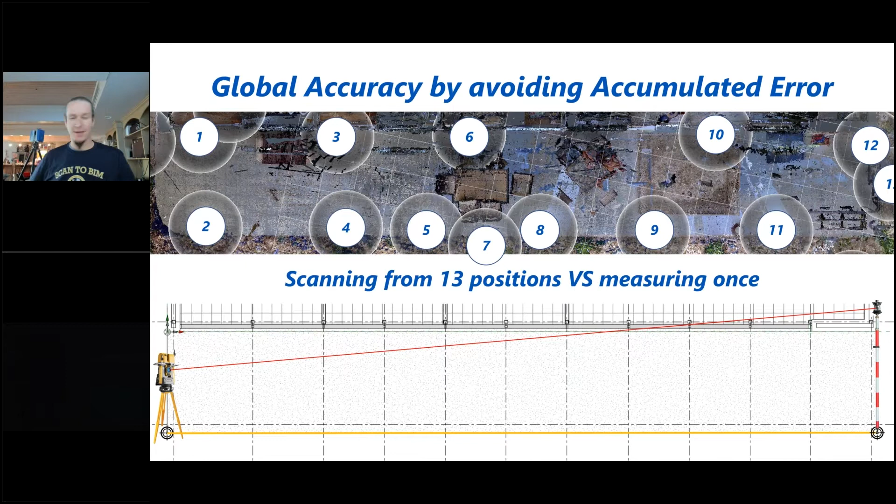So there's a couple reasons why control is really useful on scanning projects. The first one is accumulated error. Anybody that's spent time with a tape measure knows this the hard way. If you take a bunch of small measurements and add them all together, then take one big long single measurement with a much larger tape, you'll get a different number. That's because every time you make a small measurement, there's always some error. There's no such thing as a perfect measurement.

Same thing's true with laser scanning. When you're doing cloud to cloud, you're doing multiple setups. In this example, there's 13 setups on one small exterior facade of a relatively small building, which means there's some amount of error between all of them. As opposed to control, which is usually established using a total station with much longer ranges. They take lots of measurements at the same point, so you get really accurate single measurements, and that really allows you to get rid of that accumulation. So 13 positions versus a single measurement.

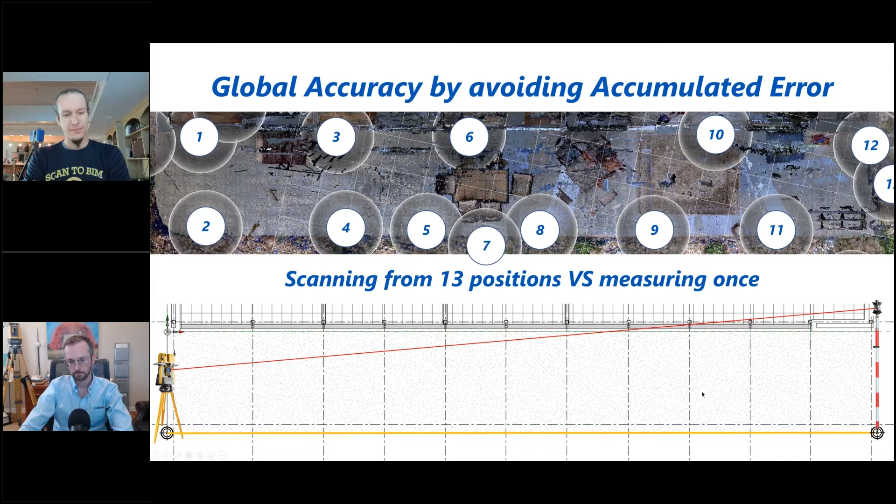That's the difference between plus or minus 13 millimeters versus plus or minus 1 millimeter, if you think about the potential compounding error, assuming you're getting plus or minus 1 millimeter in your cloud-to-cloud matching, which is probably a little optimistic. Now it doesn't mean it's always 13 off - it might be 6 off, might be 2 off, might be 8 off. But that accumulated error is something that can really bite you, particularly on larger projects and in long corridors, long facades, things like that. So yeah, it really adds up.

So doing these single measurements for control really lets you rein that in and get it down to a minimum number of overall measurements.

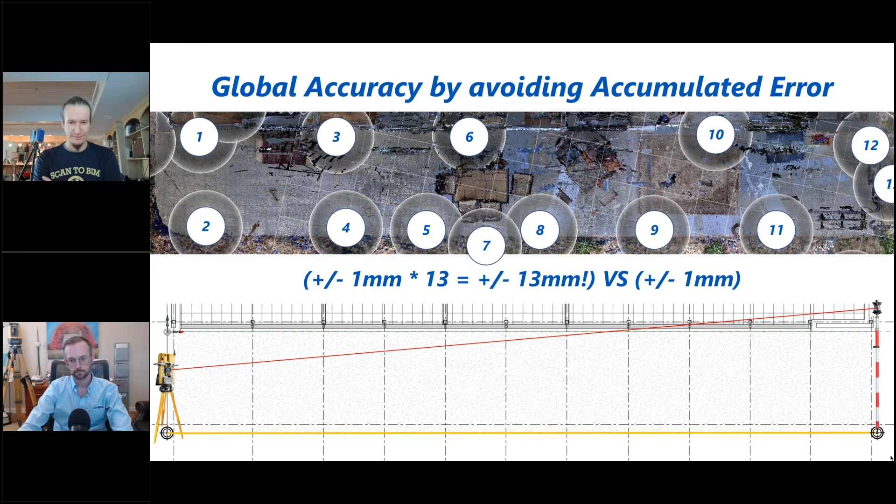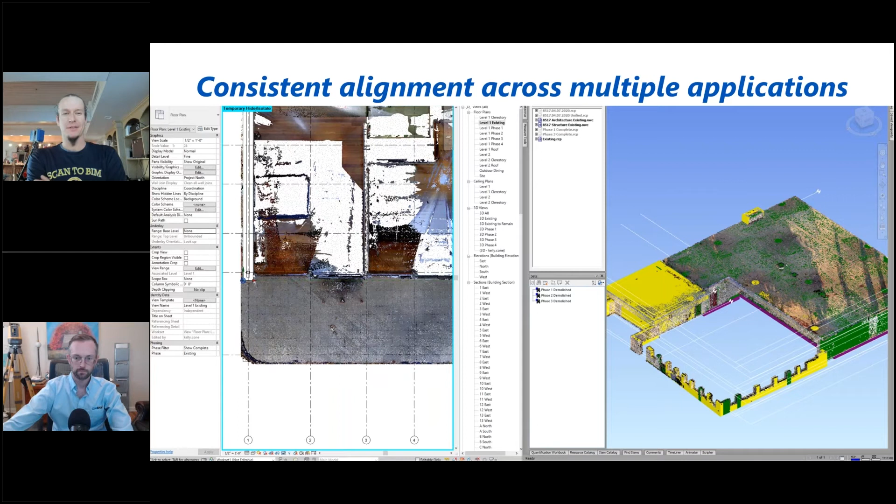The other critical thing for having a control system - and again, it doesn't have to be a survey control network you're tying into, just some kind of control network, could be assumed on the site, could be project coordinates, whatever - is that getting some kind of control set up allows you to consistently bring your point cloud into multiple applications across multiple companies and have it actually show up in the right place every time.

I don't know if anybody's ever messed around with trying to nudge a point cloud and rotate it into place in Revit. If you're the only person doing that, and that's the only application you're using, okay, I guess that's fine - you can't do it super accurately, but you can probably do it good enough. But the moment you want to pull that into Navisworks and have the point cloud show up in the same place, ugh. Or what if you wanted to...

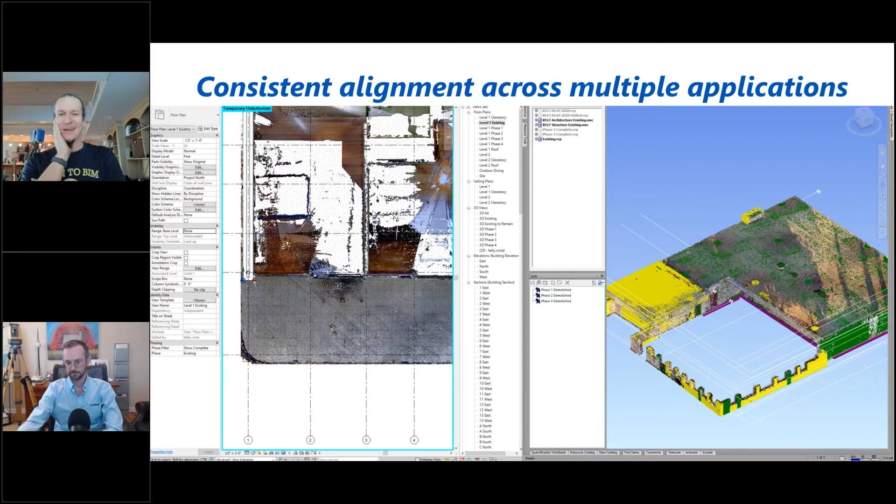What if you wanted to pull it into Recap, since now you can bring Navisworks models into Recap? Well, if you didn't have that set up correctly, good luck. Same thing if you want to go into Tekla, or any other platform - having that consistent alignment across multiple applications is really, really important to scale the technology.

And again, if you've done any registrations in bathrooms, places with mirrors, lots of glass, you'll know that you'll get a cloud-to-cloud alignment and everything will be green. But when you look at it, it's rotated 90 degrees, or completely shifted off, or something else. The cloud-to-cloud gives you statistical metrics based on the algorithms used to do the match, but if they picked bad surfaces or bad alignment, the statistical metrics can be great, but the alignment can be feet, hundreds of feet off.

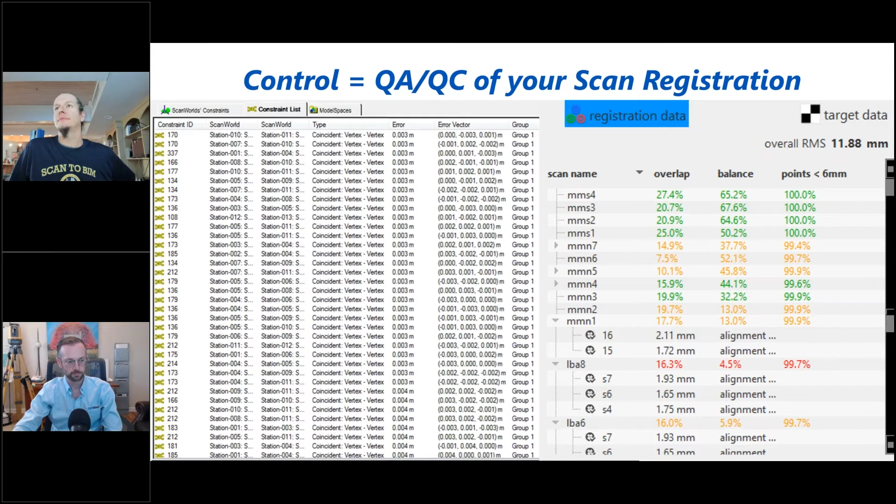Yeah, that's a great point, Kelly.

I think, talking about establishing control for a job, we're going to really speak to why it's important. So imagine this is a scan of the structure of a mid-rise building, for instance.

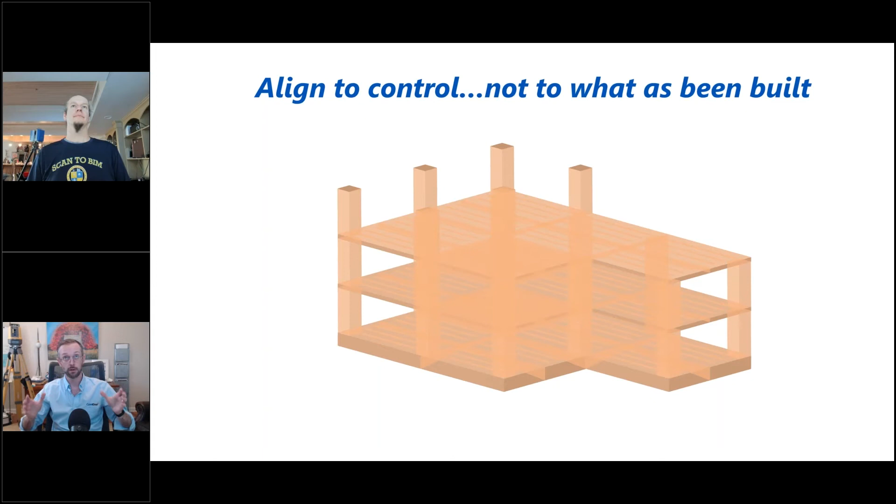If nothing has been designed yet, and if you're scanning existing conditions only and nothing has been modeled, you can get away with doing cloud to cloud and not establishing control, although we will speak to why that's still dangerous. The minute that a building is getting built and you are validating whether something has been installed correctly, or scanning because you're tying a really unique facade to the exterior of a building, whatever you're doing, not tying into control can be devastating for your job, and also for you as the person performing the scanning. Here's a good example of why.

I see all too often people will scan and align a scan of the floor to the design model, but how many jobs are perfectly built? The answer is like none. So if you align your scan to, say, a column that's 2 inches off, well now relative to that floor, everything else is going to be 2 inches off. Or you may align and think everything is fine, when really there's all this stuff that's been installed incorrectly. You will never catch it until it's too late.

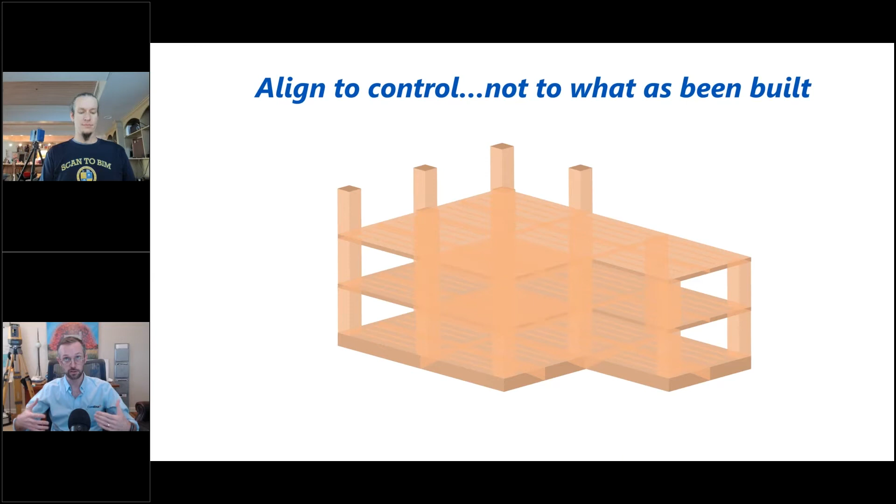The point of scanning, especially as a project is getting constructed, is to catch issues. So if you have control, if you were to tie into that survey or control network used to build a building, the scan is shifted and it will highlight installation errors or something you should truly be concerned about. It could also keep you from thinking something is wrong when it's actually a red herring - something may have been installed correctly, but the way you aligned it made it look like it wasn't. So it's very critical, especially as you're pushing scanning on projects or selling it as a way to mitigate risk, that you tie into control whenever possible.

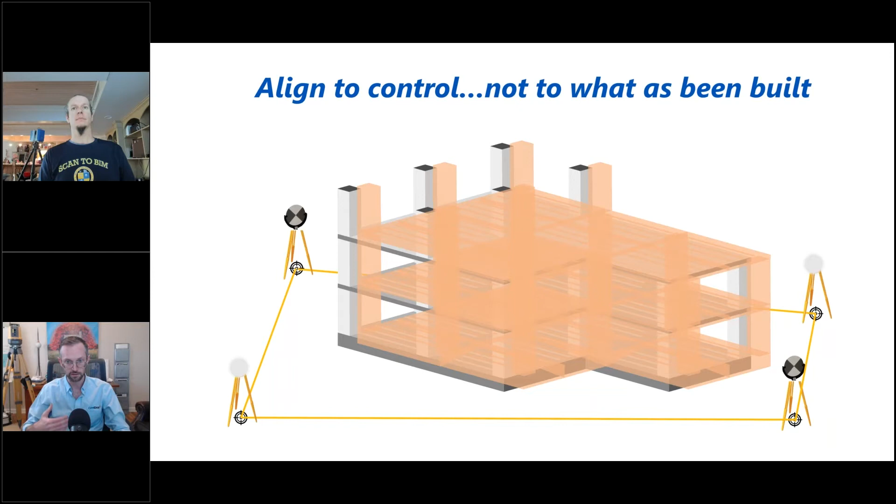Now, depending on the piece of equipment you are using, it is very important to understand what kind of targets you can utilize. So we have survey targets on the left. There are scanners that can actually utilize those survey targets, as well as total stations. Planar targets are fairly popular for cloud to cloud - you'll see every cloud to cloud job use a lot of paper targets that we mount to walls so we can constrain ourselves to those things. And then there's geometric targets, which are also really awesome to utilize, especially at distance because of their unique shape.

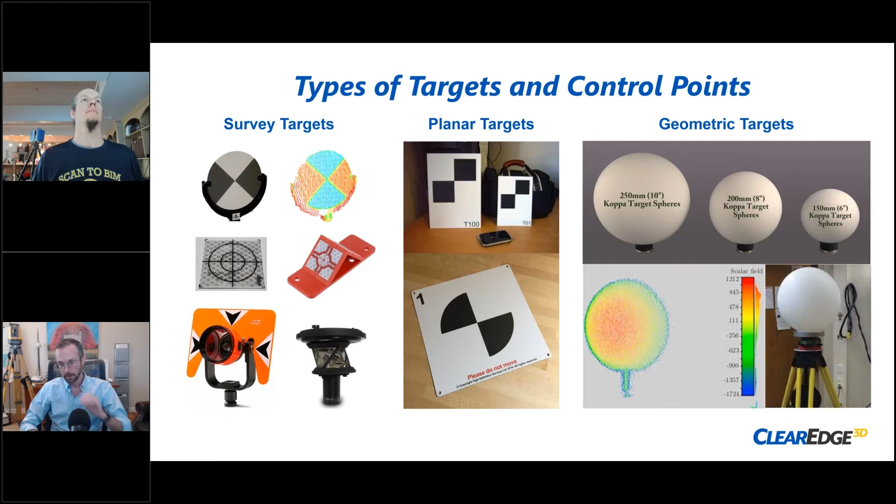Besides that, if you are setting control for the first time, you can literally just put monuments, or nails in the ground, or use a Sharpie to establish this is the thing that I'm going to set up on. And what we mean by that, we'll actually get into in a second.

So before we get into setting control, for those thinking about getting into surveying for scanning jobs, traditional robotic total stations can be fairly expensive, but there are some good and cheap investment options for you, like the LN150 from Topcon, and others. I just suggest looking at that if this is your first bout with starting surveying. It's super low cost, it self-levels, it has a great range for most jobs you're going to be on, and Bluetooth technology, so you're not worried about losing tracking of the instrument itself - if it was just Wi-Fi, at distance you could lose it.

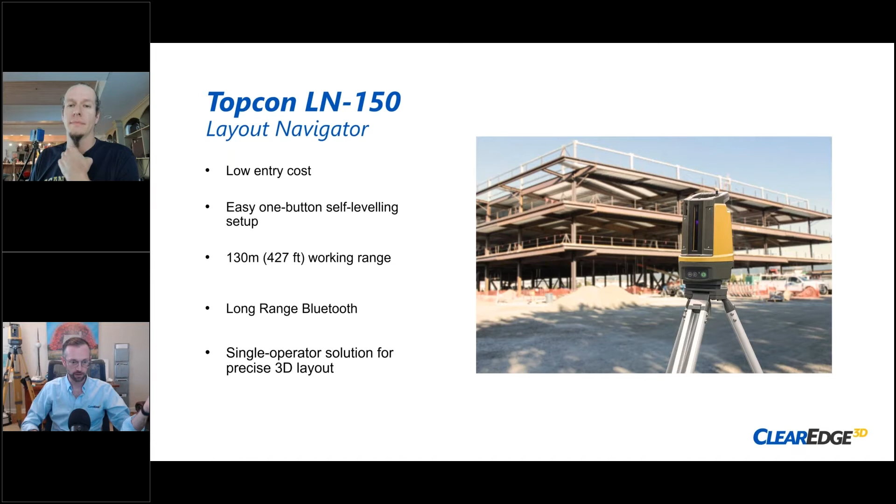Yeah, actually it's funny, James. We got a question coming in from Scott Reed, one of our customers, Prolog, and apparently Scott just picked up an LN to supplement their optical total station. So yeah, Scott, it's a great instrument for getting control out there.

The thing you can't do with it that you can do with your optical total station is bore sight, a black and white crosshair on a target. But you can, of course, as long as you've got the pole with the rod, set it up on any floor targets really easily and basically use it the same way. So it just depends on how critical that ability to bore sight is, but some of the other stuff you'd shared with us in terms of having that cool stick at an angle, things like that.

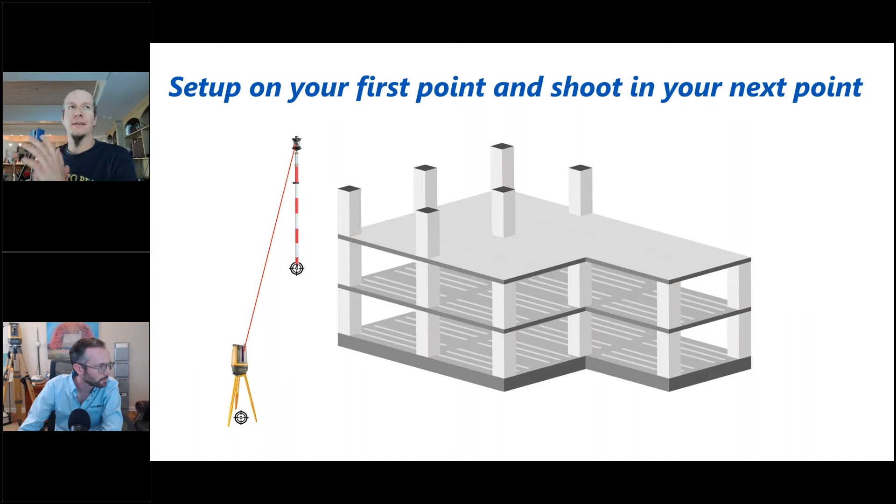If you put prisms on those things instead of spheres, absolutely you can use the LN to do very similar stuff. It's really just a simple instrument, the kind of thing you don't have to be an expert at surveying to utilize. I think that's the scary thing, though. A lot of people can mess up setting control because the software and the instrument itself require way more expertise than most people are trained on. So something to think about.

Okay, so let's say there's a job where, like we showed prior, the scan had shifted, and we said put yourself on control. So how do you do that? If there's nothing out there, or if you want to set your own control as a source of truth to come back to for this job over and over, or to give to a design team to model from in Revit or whatever.

You start off by marking a point on the ground, then set your instrument on that point. Then you walk with your prism and shoot in another point. You want to make sure the distance is pretty good. Imagine if your next point was only 5 feet away, and the point after that is 100 feet away. There's error, right? Because these poles, you reduce error the farther your shots are from each other.

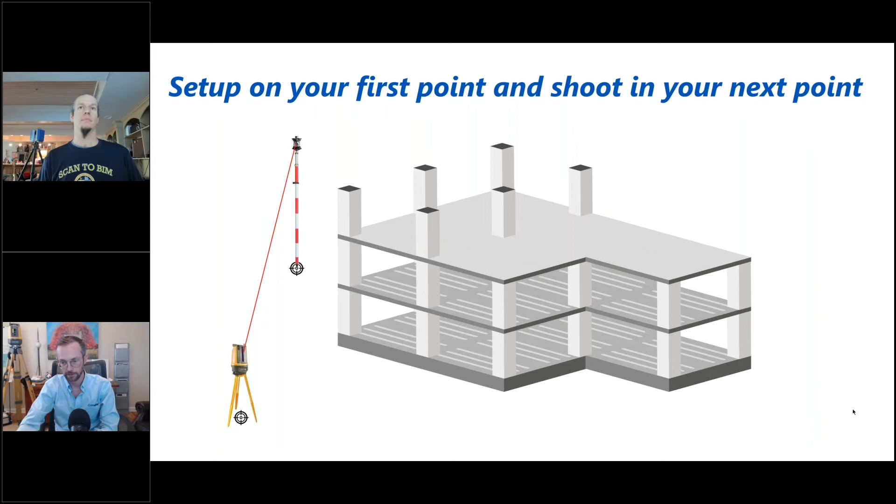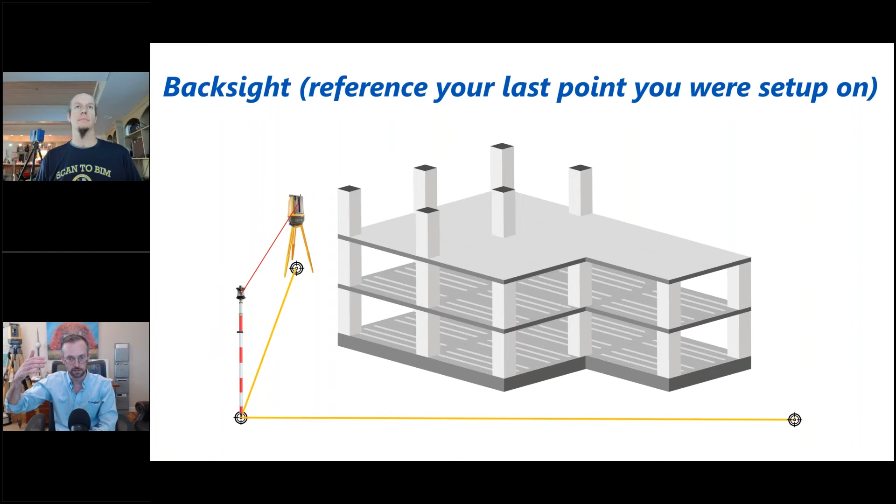So to keep it simple, you set up on your first point, and if you know where you're going to end, imagine we're going to build effectively a square around this building, we may want to save time and shoot in the point where we're going to finish. Then we make our way around the building, referencing the last point, turning 90 or 100 degrees, whatever it needs to be, shooting in the next point, and rinse and repeat. Super simple, really fast.

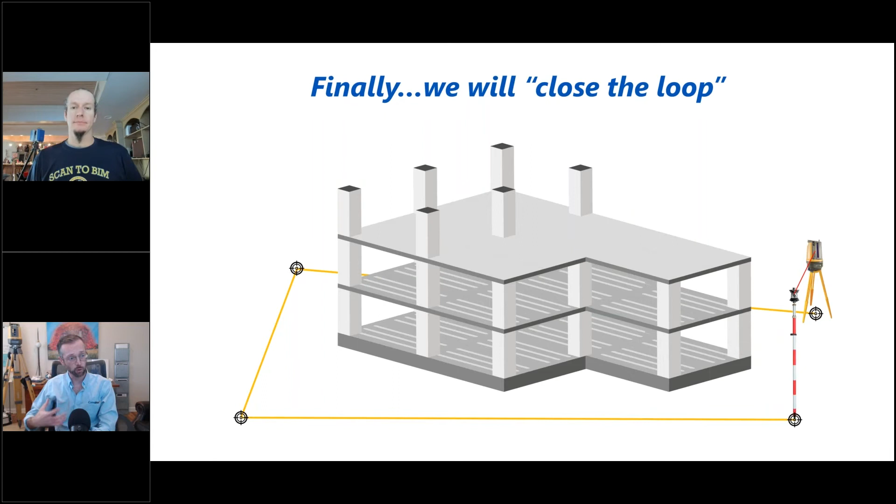And then all of a sudden you have a coordinate system that you can reference for your scanning project.

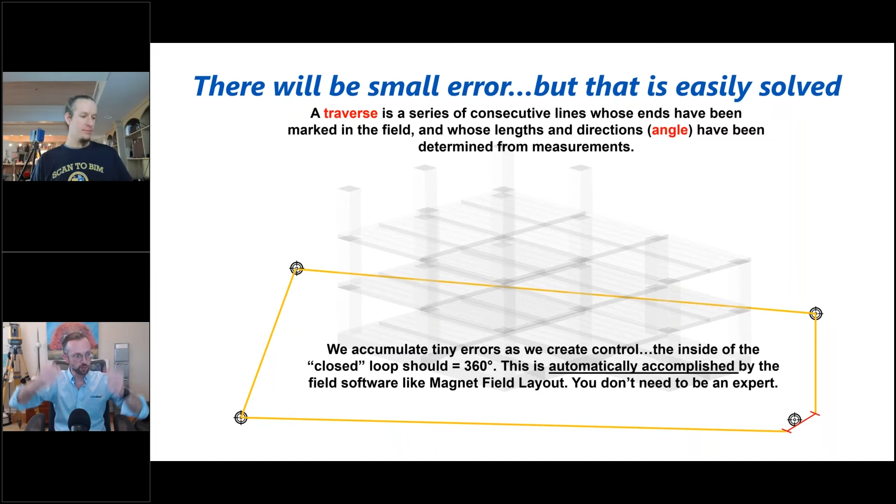Something to note: just like with scanning, if you traverse with a scanner, traversing is doing a setup and moving, and the distance between those lines is called the traverse. Best practice for setting control in a job is you want to close the loop, make a full polygon, or complete your square. This is effectively a polygon, or it is a polygon.

All polygons have 360 degrees inside them, but as you traverse, you actually just accumulate error. There's a little bit of human error, and there's error in the instrument you're using, no matter what it is. But not to worry, the field software you're using will automatically distribute that error across the polygon, and then you have a very tight control network you can rely on consistently.

So those of you that've done a lot of scanning have seen this: you go down a rectangular corridor with your scanner doing cloud to cloud, and when you come back to that same area you scanned the first time, boom, all of a sudden you've got visible error between the first scan and the last scan that you then have to build a link between, rerun it, and hopefully that closes everything up tightly.

But the same thing is true with total station measurements. The difference is instead of 100 measurements between the first and last scan, you have 3 or 4 or 5 or 6. So those check-in points are much fewer, and the errors are much smaller overall, but there is still an error to correct for.

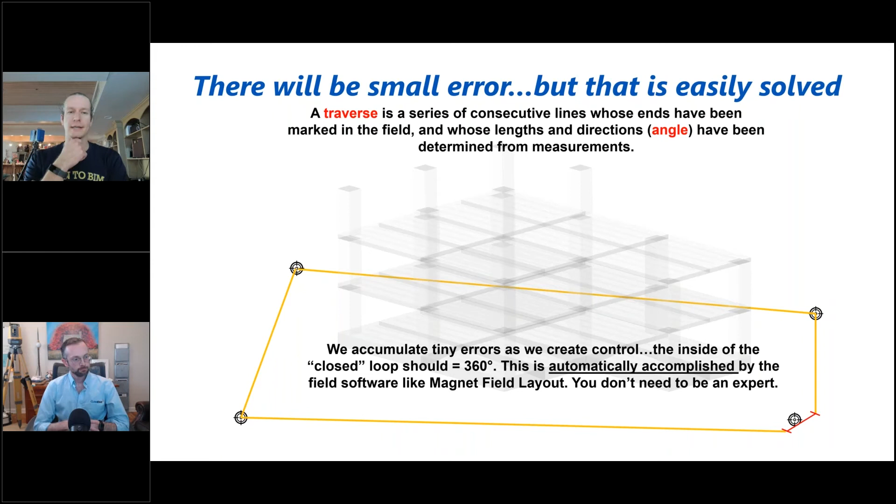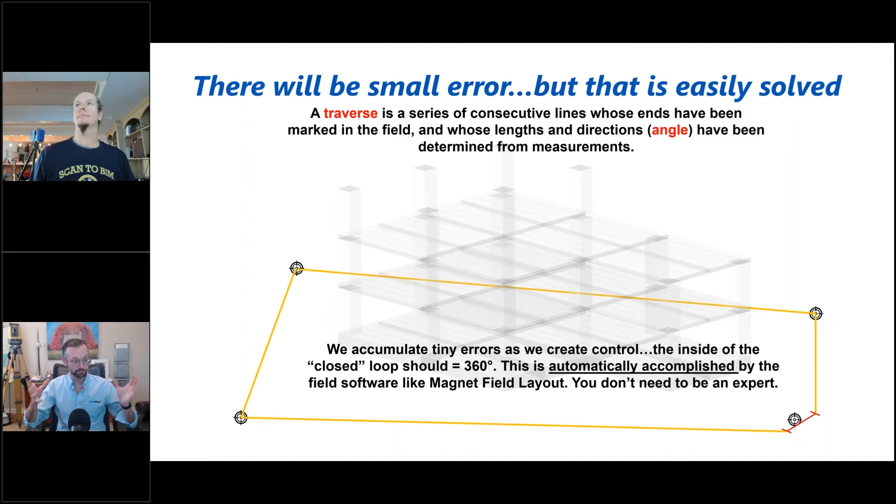I'd say specific to prism poles or calibration, you can just give us a call after on some of those, because there's things called a peg test you have to do, but they're normally handled by whoever supports and maintains your equipment, whether that's you or who you bought it from. Any advice on grid or ground coordinate systems from Shannon?

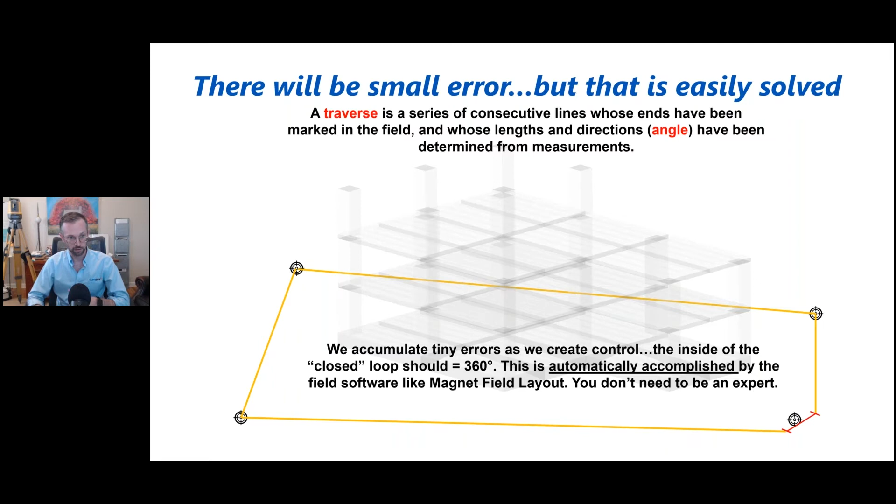If there is a job that has a coordinate system, ask for it before you get to the job. If you're going to be doing scanning, and they don't have control in a place or survey points where you'll need to reference your scan data from, just tell them where to put those things. I'll talk a little bit about that coming up right now.

So now we've closed the loop, we've distributed the error, and we're ready to scan. Imagine if you're on a project on the top floor doing installation validation, or whatever it is you're doing. You want to ensure you have line of sight of the prism, whether it's a sphere or a target. Set those up on points, and if you're doing this floor to floor to floor, keep them in the same spot each time you come out to a job. Always stay consistent with what you're seeing.

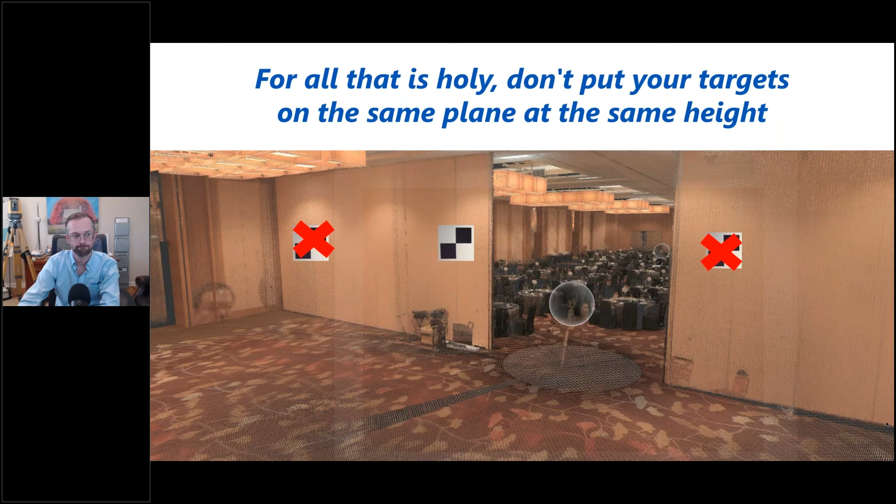So go ahead and hit the next slide. It's really important when you're hanging up targets and using them as a supplement to the cloud, to make sure you hang them at different elevations and put them on not just vertical surfaces. It's really helpful to put them on a floor or ceiling, things like that.

Anything you can do to increase the 3D complexity of those targets, the auto matching will work much better. It's super useful if you're in a core and shell space with a regular column grid, since cloud to cloud is going to fall apart there. If your targets are all at the same height, your auto matching targets are going to fall apart too. If you can just randomly vary them, you can usually use targets to get everything stitched together appropriately. So wanted to throw that out there.

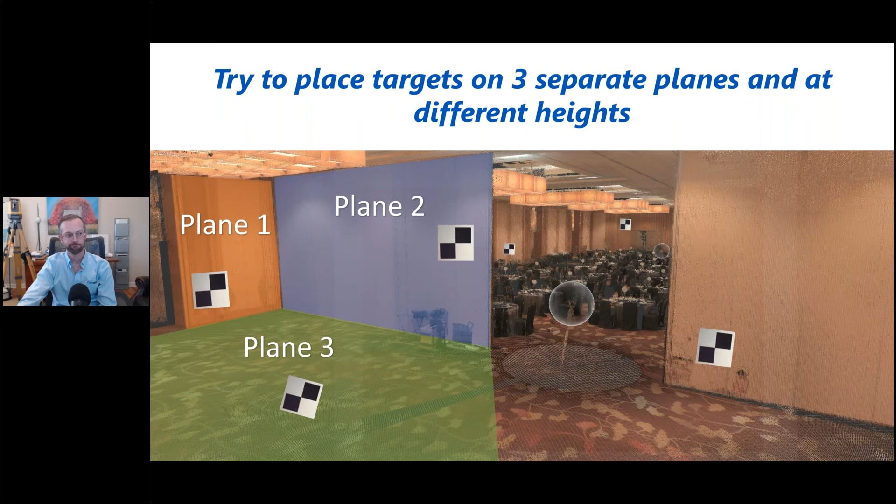You'll also notice you definitely need targets in both rooms. You can't just hang them in one. So you've got to make sure that as you set up your scanner, you're really thinking about which targets it can see when you're using this kind of mechanism.

I think this is important too. So to ensure you've got good overlap, when you're going through doorways or openings, make sure you're always scanning right in the center of the doorway or opening. And in fact, you can also scan right on either side of the doorway. It kind of depends on how constrained the doorway is and how constrained the room is, whether you need one or two scans at each door. That's another common mistake when people are relying on cloud to cloud.

If you've got good targets and survey control, you don't need to be as paranoid about that. In general, having targets and survey control reduces the number of scan setups you need to completely register the job. So there's always a trade-off there in time.

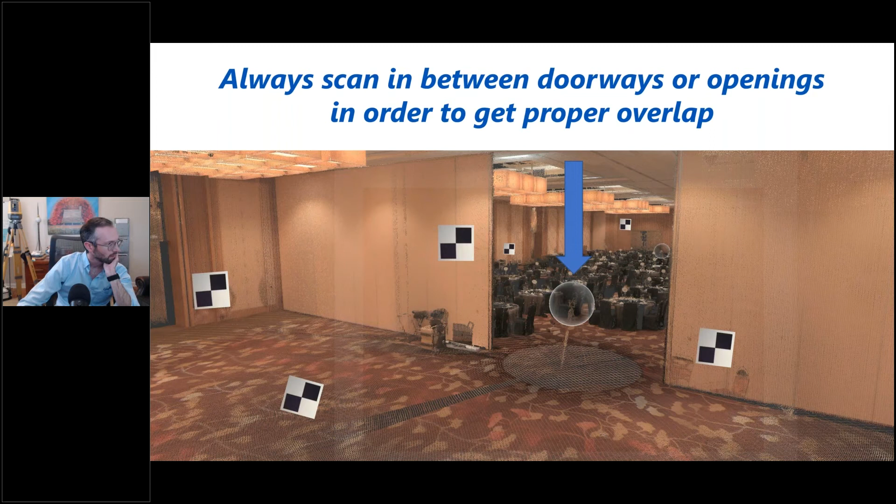Shannon had a good question: what if you can't see control from the outside because the windows are installed? What is your advice to place control for subsequent revisits, once all the surfaces have been covered over as the building is being constructed?

In that situation, you may have to reset control and traverse up the building. A big thing to note, if you're going to do that, is you'd want to set control going up each floor if you can, which means you need to go up one set of stairwells and then traverse down the other set, because you effectively want to close a loop. Stairwells can be kind of dangerous for surveying up, so you need to be very careful with that.

We do have an answer though: you can also set control in the stairwell, then scan up the stairwell and constrain them. So that's one option. Also, if you can get on top of the roof, it may help, but it requires a bit more of an answer because every job is different. I don't know visually what your line of sight or other constraints are, or what the intent is, so it could be something we leave for QAQC, since that actually happens to a lot of people.

And sometimes the end result is you do this: you reset control, you scan, and then you tie your existing scans back to this new set of control after the fact.

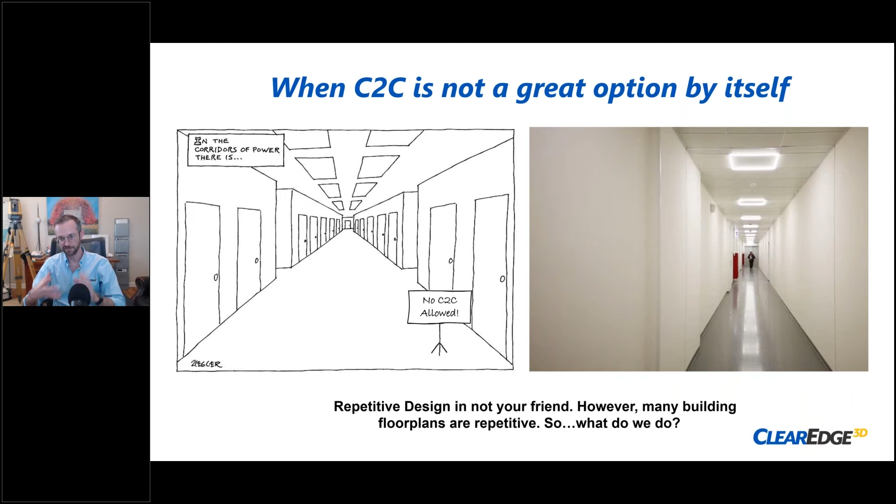This is dangerous for cloud to cloud, and it can be especially dangerous if there's a lot of glass or mirrors everywhere, that's like a total killer for scan jobs. So what do we do if we have too much reflection, or a completely repetitive space where nothing really seems unique?

Well, we have an example project for that. This is a conference center with glass everywhere, and generally it's just not unique, every room is the same. How do we protect ourselves from that when we say, hey, we're going to go do this job? Well, if anybody's been to the Marina Bay Sands in Singapore, that floor plan may look familiar.

Would you feel comfortable shooting through a window, even single pane? No, it's going to refract and affect the angle if you're shooting down on control. I strongly suggest never shooting through glass, even if you can see the control through it. Open a door, get up on a roof and shoot from there, or carry the instrument through the stairwell, go in from the ground floor and carry it up. Shooting through glass is never a good idea.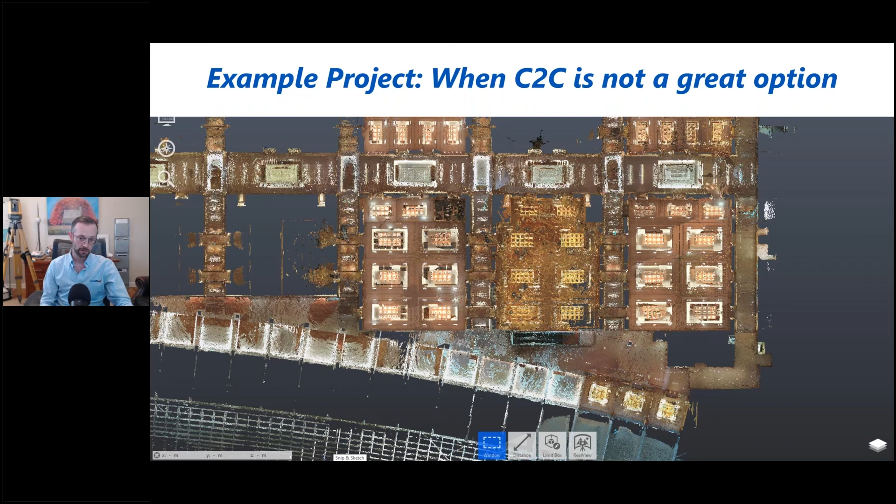If you're going to be surveying, you can do a kind of 2-for-1 situation to become more efficient. A lot of times when we're making fee on our jobs, doing scanning consulting, it's about how much time you spend on the project and reducing labor hours while setting control and scanning at the same time.

A good option is there are hybrid instruments out there that can set control and scan. The GTL 1000 is definitely one of them. I think it's a phenomenal instrument. It runs 360 dome scans, and it's really fast and highly accurate.

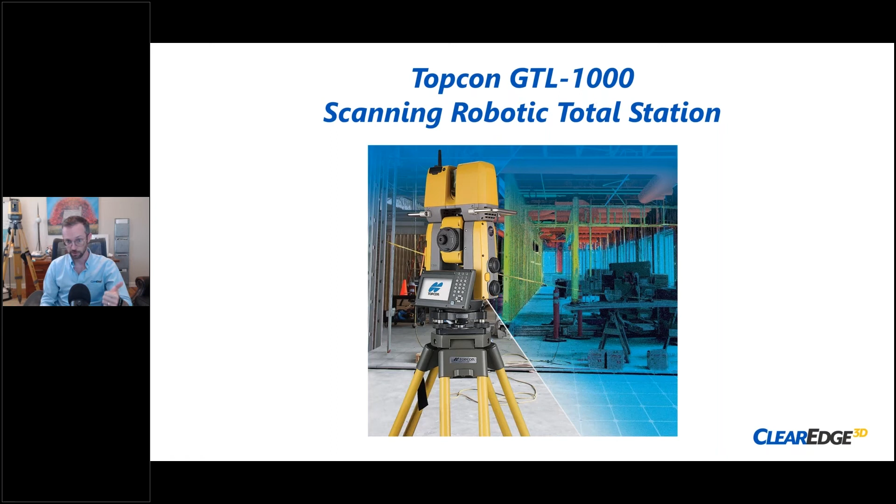For this job, it was a large project, and we wanted to create a closed loop. So we created control scans and used those scans as anchor data, setting up on a new point, shooting the next point. At each point we occupied, we scanned with the GTL all the way around, and it runs through in about 10 minutes and registers itself to the coordinate system. Then you bring that into Cyclone and tie it to all the other scans you're using.

One thing to note: make sure if you're going to use C2C with this, that you have overlap. So if you're using a Faro, an RTC, or a GLS, scan in those same similar areas so there's enough overlap to do C2C, meaning you don't have to tie directly to the control point, which is great.

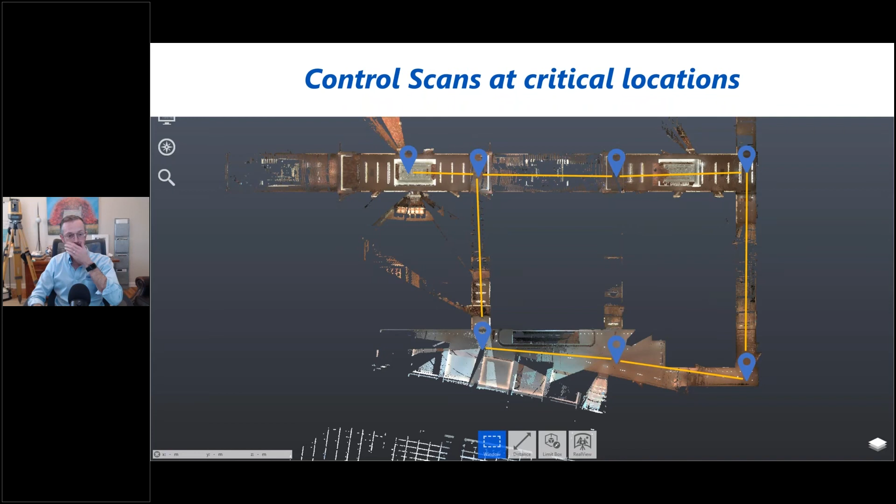Here's a photo, a screen capture of the scan itself. It's super accurate and easy to model from, which is the thing that matters. That's why we do it.

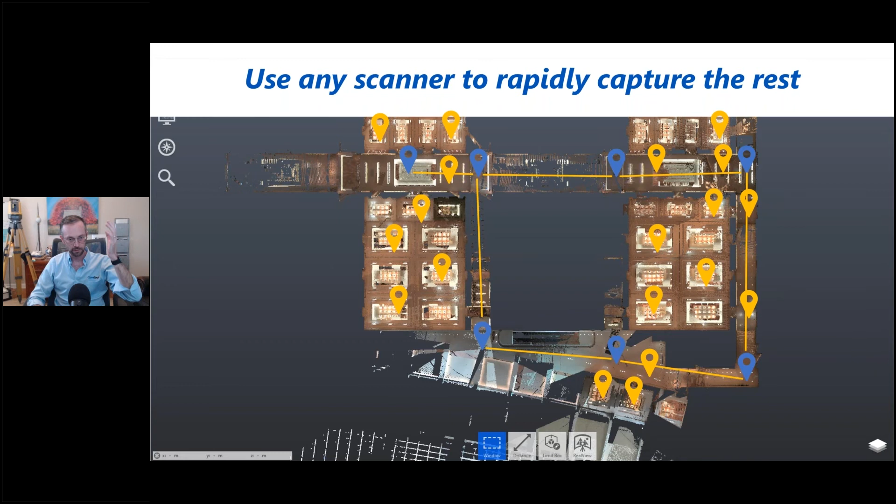The other thing it's really good for: if the blue is the GTL, the yellow is a Faro or RTC or whatever, and the third is mobile scans. So it's also great for tying mobile scan data too, depending on the mobile scanner you're using. These are just things to think about when you're trying to attack a job, especially given the size of it and the use case.

The benefit, though, is when you have a hybrid instrument, you can use it just as a scanner by itself, and then it becomes your anchor data that you can rely on always, which is very key.

Another thing: when you have a hybrid scanner traversing up a stairwell, you can scan in that stairwell instead of setting control. You set your control at the opening doorway, imagine a stairwell right there. You set a point, put your sphere or target on it, then just scan and traverse up and scan again, and that becomes scan data. There's a lot of points to tie to, registering to itself via C2C but also tying to the floor below. It's a cool new way to think about bringing control up a building.

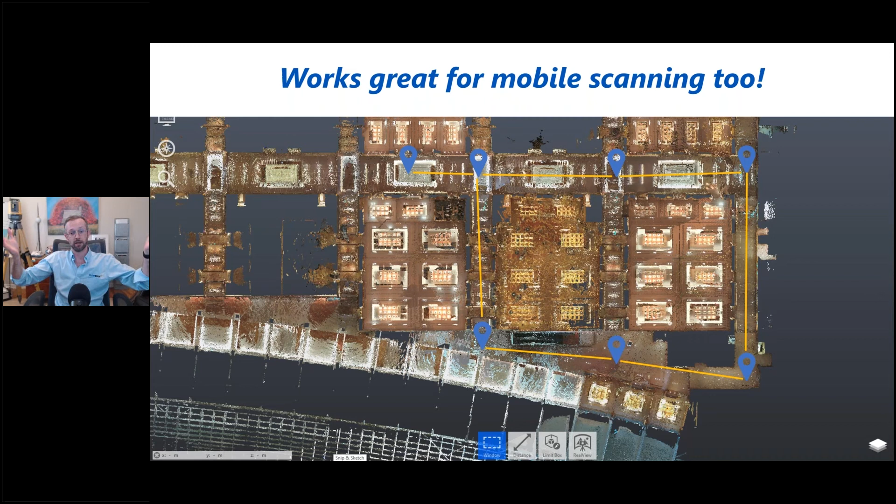Much safer method. One thing to point out, since stairs and doors were brought up: you always need two stairs, and you want them on opposite corners of the building. Or you want multiple doorways, hopefully on opposite sides of the building, because going back to closing the loop, you don't want to go through just one doorway, since it creates a rotation point. Rotation errors are 9 times out of 10 what causes massive problems in laser scanning registrations, because that rotation compounds over distance, and it can really bite you.

So you always want to go in the front door, go in the back door, go up the back stairwell, go up the front stairwell. Make sure, whether it's with control, setting points, or scanning, that whenever possible you get that second point to anchor back to your exterior control network. Super important.

Yep, it's hard to think about, but there was a really good point, like always stress having long backsights. 100% - meaning you don't backsight something that's 10 feet away then shoot a point that's 100 feet away. But when you're scanning up a stairwell, it's the chain. It's hard traditionally for anybody who's done surveying to think of it this way, but your error is still so small when you're doing C2C up both sides of the stairwell, tying to control from the floor below, which is really great.

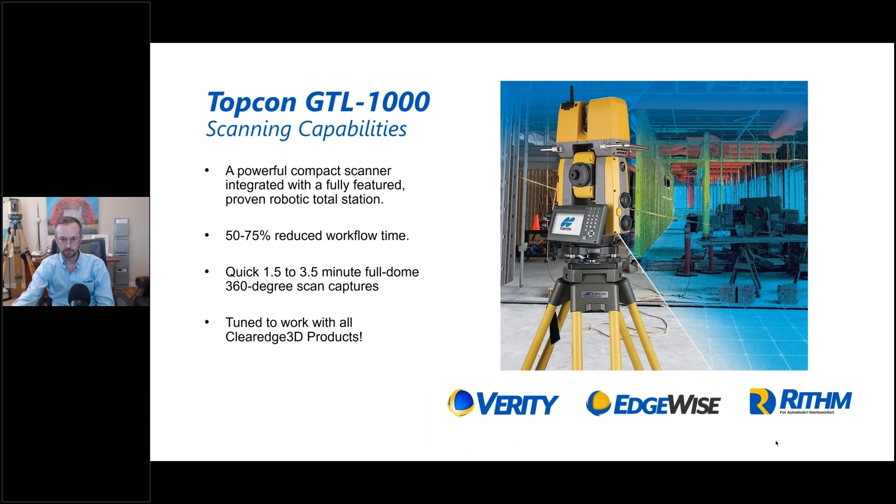Let's see what we got here. So for Verity and the GTL, right? It's a plugin for Navisworks. It's great for analyzing, has my building been built right? And it's a great way to hold your job or people accountable on the project to make sure you don't have profit erosion on your project. And then it publishes to BIM Track, Procore, and BIM 360 Field, which is great. Those are kind of the most pervasive project management tools used.

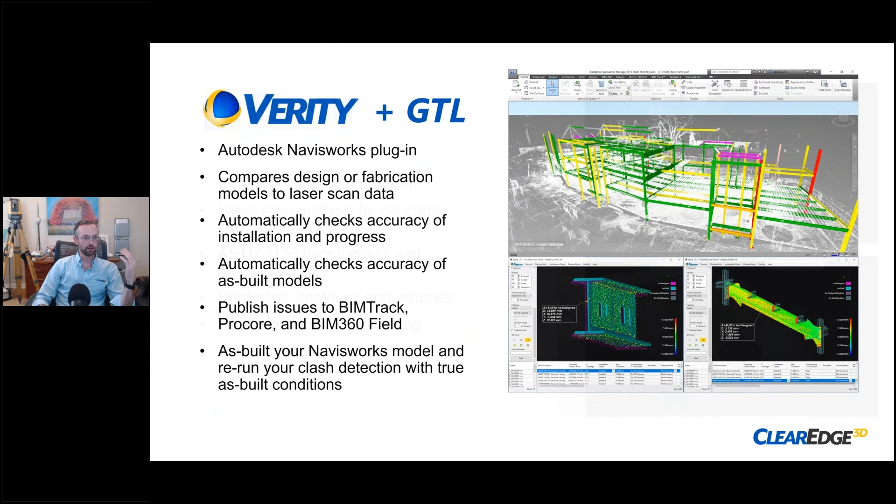And then another very kind of ubiquitous task is floor flatness. So you can always scan the floor, run it through Rithm, and get an ASTM E1155. That's important for, like, if you're building ice rinks or doing data centers or anything where floor flatness is very critical.

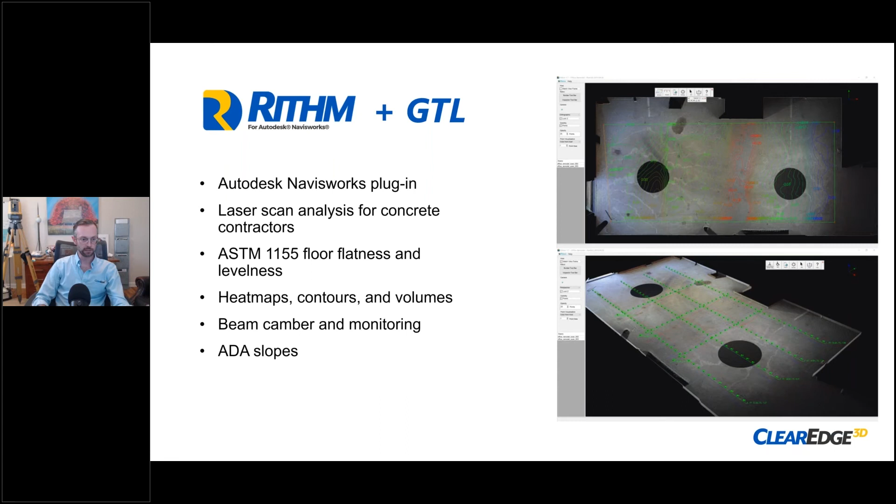Let's see what else, oh yeah, go ahead. One of the things I was going to throw out there is a lot of these more recent workflows that are leveraging laser scanning for a lot of different things really are best suited to having a control network and tying into it, so that you're getting absolute measurements and results. Getting relative results on installation validation or floor flatness is a lot less helpful than getting absolute results on it, but getting absolute results requires some kind of control network and tying into it.

And then for Edgewise, which is really what got ClearEdge kicked off, and is a product used across MEP, FP, whether it's commercial construction or plant - we've now finally tuned it to work with the GTL, so the results are actually really good. We'd rather show how it really works versus saying 'oh, it's perfect.' It's pretty darn good. There were 330 pipes picked up on this plant project, and only 33 bad pipes, which means there's not a lot of modeling you have to perform, and it'll literally only miss 2 pipes over 3-inch diameter on the job.

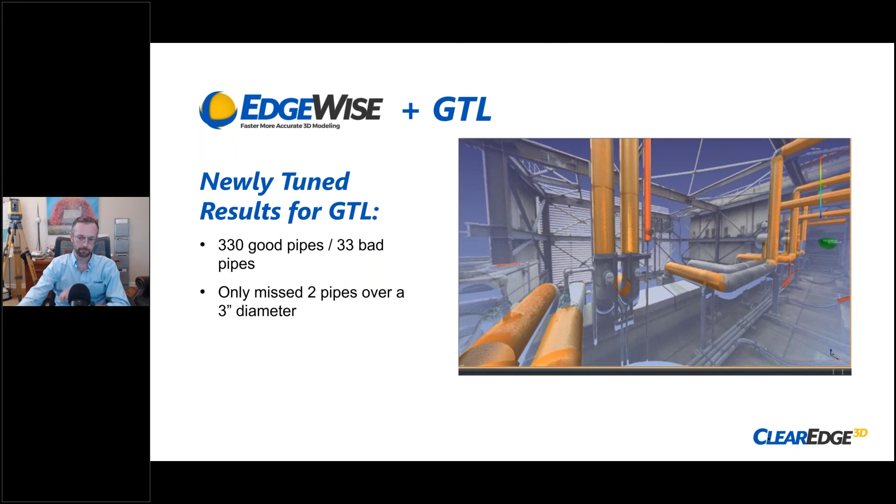And that's it. I think we're deep right now into questions. We've got 18 more minutes to really just go into people's questions and ensure we're answering them correctly.

Shannon tossed out that she's always been in the habit of - or I guess I shouldn't assume it's a she or he, have it's a name like mine - you never know if it's a guy or a gal.

Will loop up a stairwell, scan a level, and go back down a different stairwell, so that's vertically closing the loop. That's a great practice. So absolutely, it's a great way to do it with scanning. Same thing works on anything else with a total station - same practice. Scanning is basically an application of a survey instrument to something that's not necessarily traditional surveying, so a lot of the same rules apply.

Yeah, a few questions - Thomas, we'll kind of work our way up and down as well. Where you have shiny epoxy coated floors in factories, any advice on ensuring good floor flatness during registration? Well, scans don't like shiny objects, right? Or black objects.

So in that situation, I would say it depends on what the requirements are. It may be best - that's why having a GTL or a survey instrument is good, because then you can just walk a standard grid and shoot the points with your prism pole or whatever you're using. The other option is to put targets, like those paper targets, on the ground at a certain distance in between each other over a long grid, and then scan and pick those up and try to find the deviation. That would be my response.

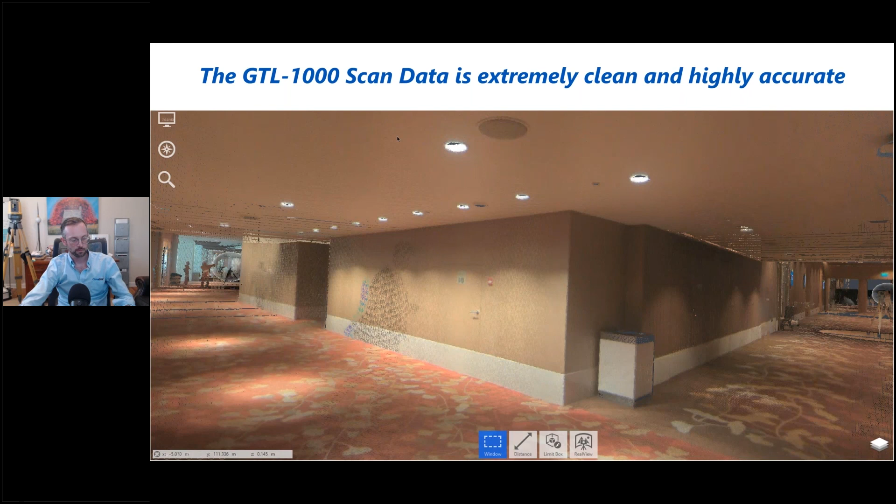My answer is I love the convenience and flexibility of paper planar targets, whether printed on cardstock for a bit of rigidity or on plain printer paper. You can hang them up anywhere with a little tape and they'll stick to anything. If you need something permanent, I've seen great printing of them on metal plates you can plug in, but every software works with paper targets—not every software works with spheres, and not every software recognizes a little paddle target.

It's reliable and works for every scanner. It's super cheap. Just be aware that when you hit targets at a high angle of incidence, you don't get great accuracy, so don't use targets that way. But you can afford to hang so many more targets. That's a go-to unless you're in a big open space like a warehouse—if that's the case, spheres are fantastic because you can shoot them from any angle and don't have to go back and touch them every time.

That's exactly right. And if, say, there's a street right here and you really don't have something you can tie to, one thing I've done is use adjacent buildings or a parking deck—they'll many times allow you, though you need permission from the building owners. If you can, these things are screwed in, so you can permanently mount targets you can reference. I did that even for basic surveying too.